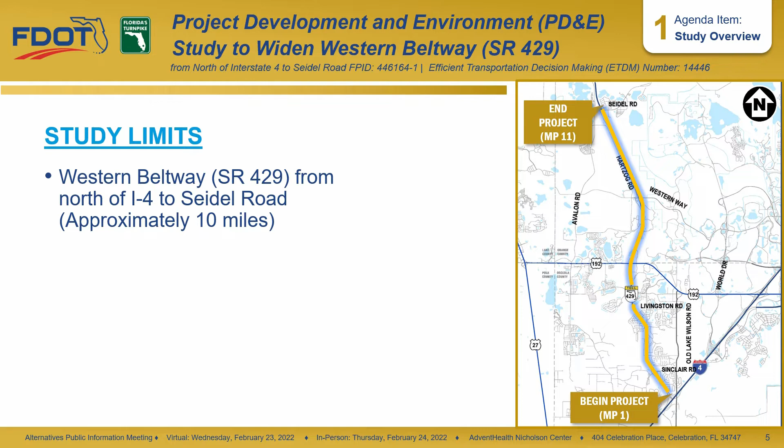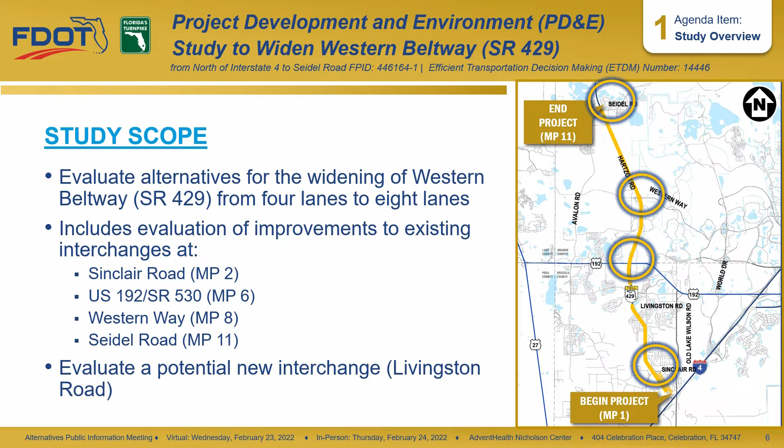The study limits extend from north of Interstate 4, milepost 1, to Seidel Road, milepost 11. The project is located within Osceola and Orange counties. The study scope includes evaluation of alternatives for the widening of Western Beltway from 4 lanes to 8 lanes and evaluation of improvements to existing interchanges at Sinclair Road, US 192, Western Way, and Seidel Road. The study scope also includes evaluation of a potential new interchange, which is proposed at Livingston Road.

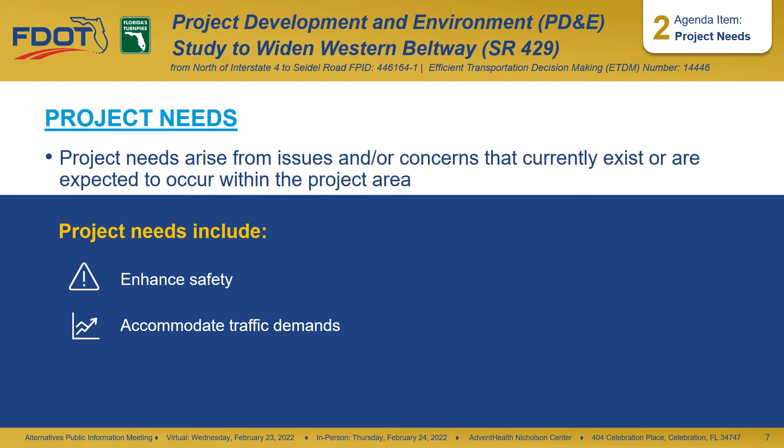Project needs arise from issues and concerns that may frequently slow down traffic, cause delays, or lead to accidents. The need to widen the Western Beltway is based on enhancing safety, accommodating travel demand through the year 2050, improving travel times and reliability, and enhancing economic viability, emergency responsiveness, and evacuation times.

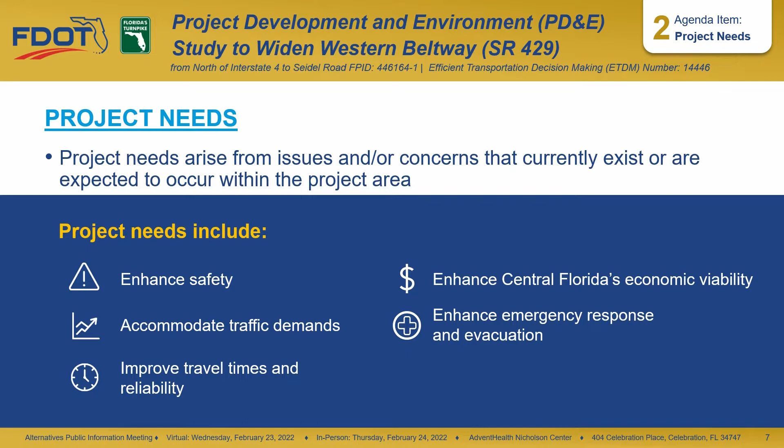Improvements to Western Beltway are needed to enhance safety. Between 2014 and 2018, there were 161 crashes within the study limits between the I-4 ramps and Seidel Road interchanges. The estimated economic crash cost is about $33 million over the 5 years. Congestion is a major contributing factor to crashes. If nothing is done, congestion will continue to rise, leading to an increase in crashes.

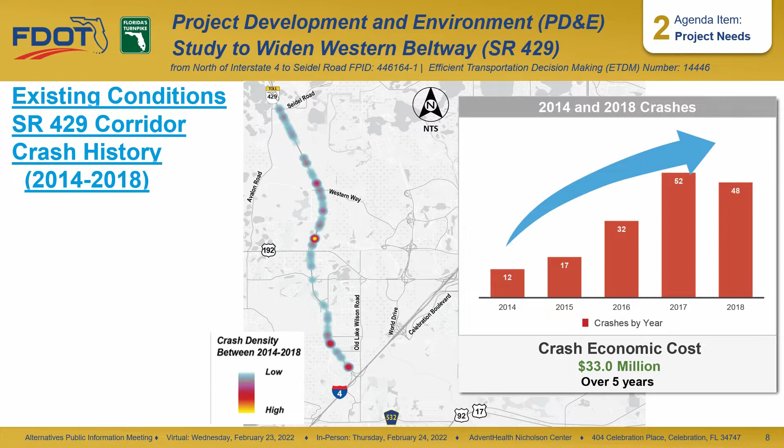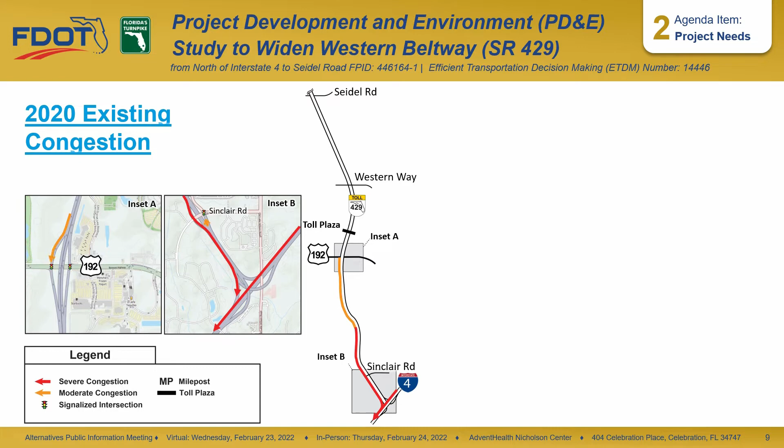The State Road 429 traffic has been increasing by more than 10% per year in the recent past years within the study limits. This can be attributed to the high increase in population and employment opportunities in the area, as well as recreational activities. During the evening commute, traffic backs up on State Road 429 in the southbound direction towards I-4, and long queues have been observed at the State Road 429 southbound off-ramp to US 192.

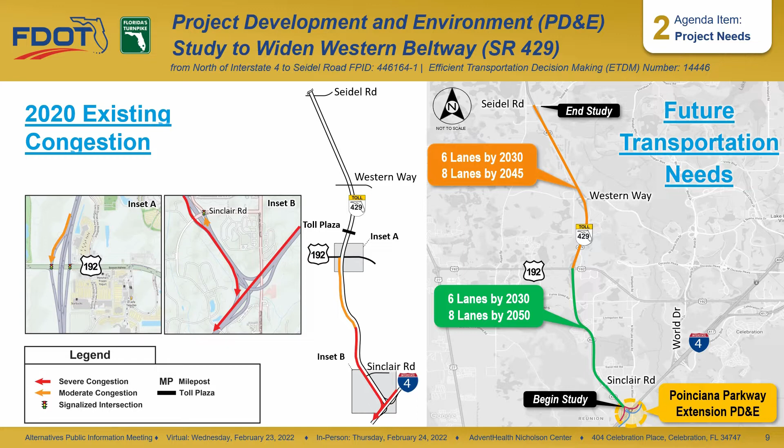In order to accommodate future travel demand, 6 lanes are needed by 2030 and 8 lanes will be needed by 2045 for the segment between US 192 and Seidel Road, and between I-4 and US 192 by 2050. The improvements considered as part of this study include both improvements to the main line and to the interchanges within the project limits, and also a planned connection to the Poinciana Parkway extension planned to the south as part of a separate study.

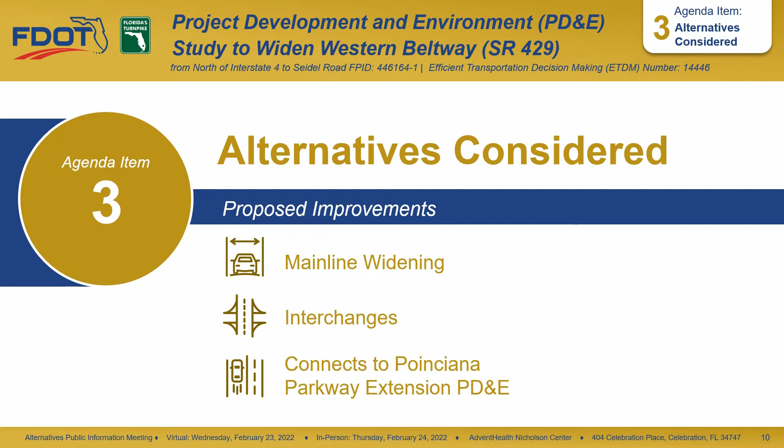In addition to widening the main line, proposed interchange improvements from south to north within the project limits include operational improvements at Sinclair Road, a new interchange at Livingston Road, operational improvements at US 192 and Western Way, and 2 options for interchange improvements at Seidel Road. The no-build alternative will remain viable throughout the study. We will cover all of these proposed improvements in additional detail.

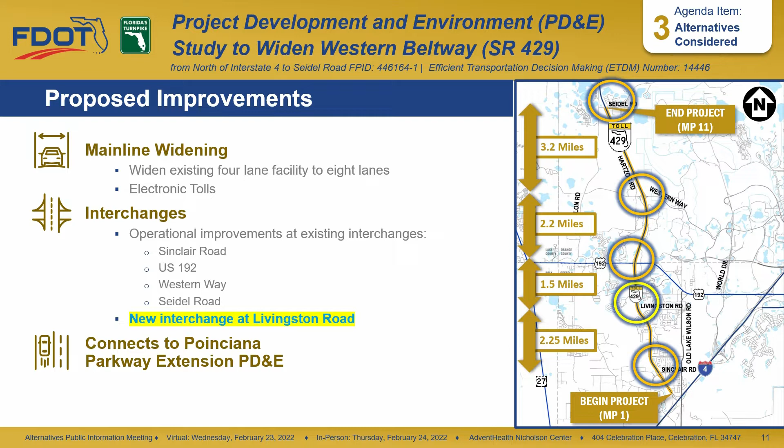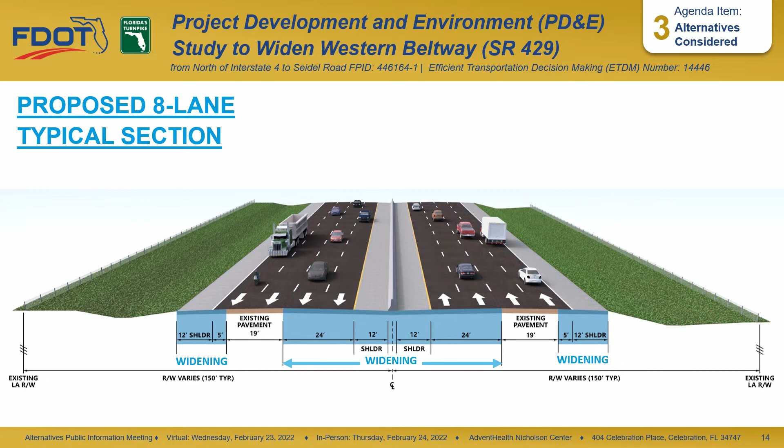Western Beltway will be widened from 4 lanes to 8 lanes throughout the project limits. This graphic shows the existing 4-lane typical section with a 64-foot median. The proposed mainline improvement widens the roadway to both sides. The proposed ultimate 8-lane typical section after widening to both sides includes 4 travel lanes in each direction. Now, we will cover the interchange improvements from south to north, starting with the existing Sinclair Road interchange 1 mile north of I-4.

This presentation shows aerial views of the conceptual design of the proposed improvements with north oriented to the right as shown. The legend shows the difference between any existing and proposed signals shown on the aerial view. This graphic shows where the project begins and the first interchange at Sinclair Road.

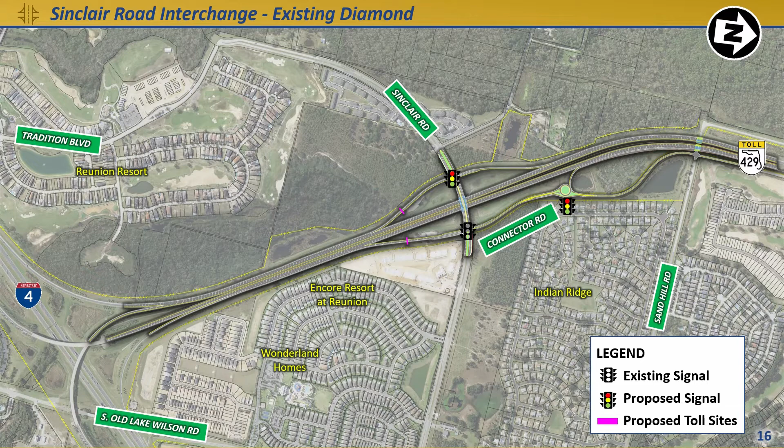The Poinciana Parkway Extension PD&E Study includes improvements to the I-4 interchange and the Sinclair Road interchange. If Poinciana is constructed, Western Beltway widening would interface with that project north of Sand Hill Road. However, if the Poinciana Parkway Extension project is not constructed, the Western Beltway widening would start further south at the I-4 ramps. The existing Sinclair Road Diamond interchange and the existing signal at the southbound off-ramp would remain.

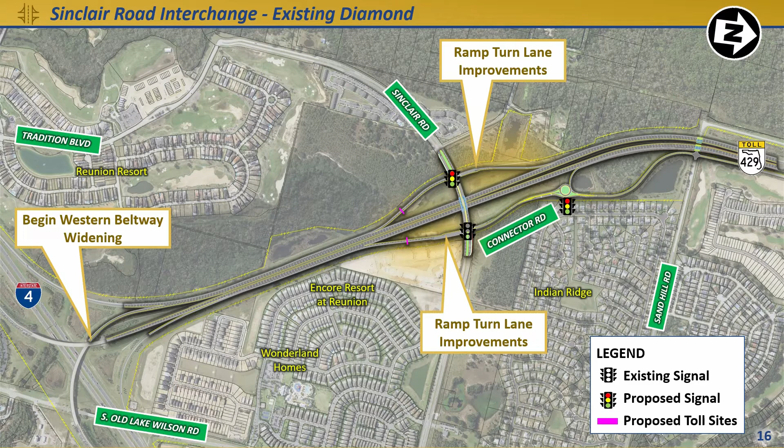Traffic signals would be added for the northbound off-ramp and the southbound on-ramp, as well as turn lanes at all the ramps. These improvements would allow the interchange to operate at a higher level of service in the future as traffic increases. There are 2 options for the Connector Road intersection with a northbound on-ramp. We will take a closer look at these options.

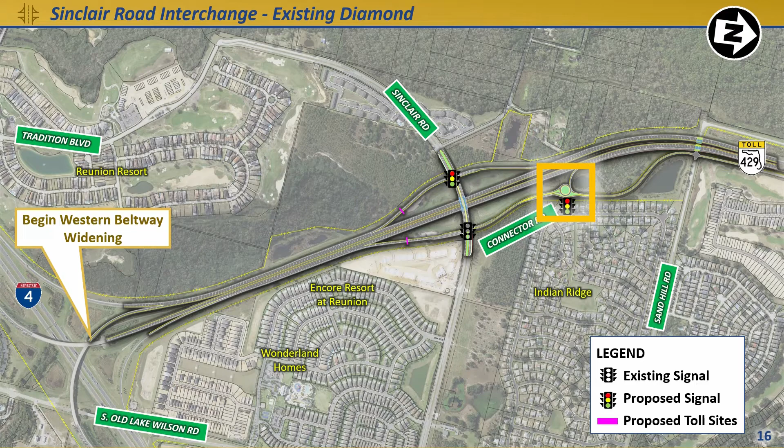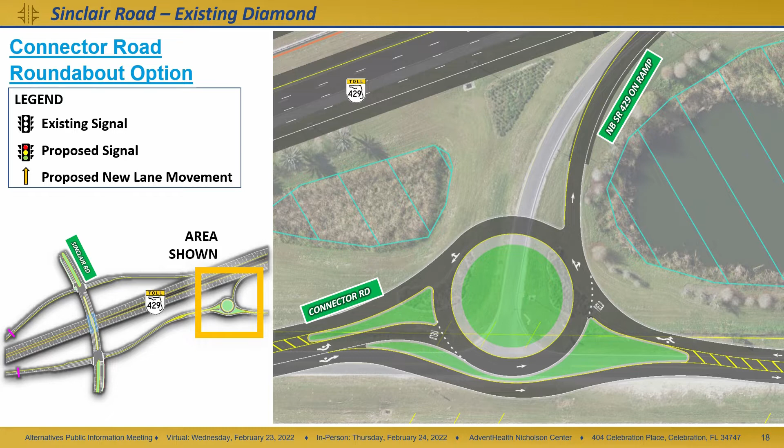The first option is the signalization option, which adds a signal at the ramp terminal's intersection with Connector Road, as well as a turn lane in each direction. The second option would be the addition of a roundabout at the same intersection instead of a traffic signal to control all turning and through movements. The roundabout option shown offers the same movements as the signalization option.

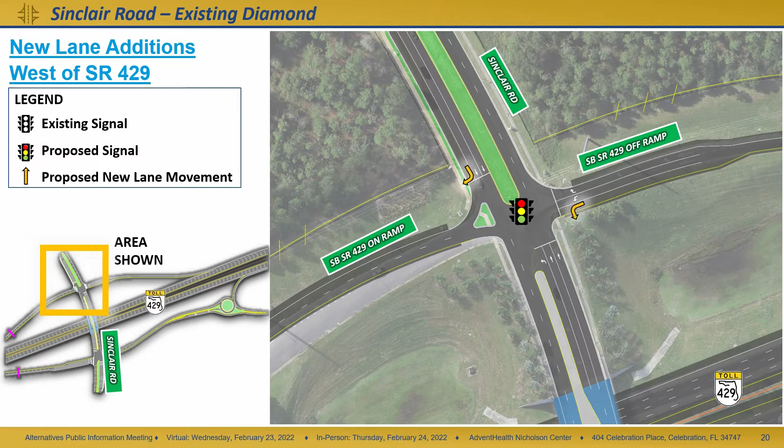Moving to the intersection of the ramp terminals and Connector Road at Sinclair Road, the existing signal would remain, but turn lanes would be added at 3 of the 4 intersection approaches. Moving west of State Road 429, a new signal would be added at the ramp terminal intersection with Sinclair Road, as well as a right turn lane on Sinclair Road and a left turn lane at the southbound ramp terminal.

The table shown is an evaluation matrix that compares the Sinclair Road interchange alternatives. Both Sinclair Road options have traffic and safety benefits that offer significant improvement over the no-build option. The roundabout option offers the most benefits at a higher cost as compared to the signalization option.

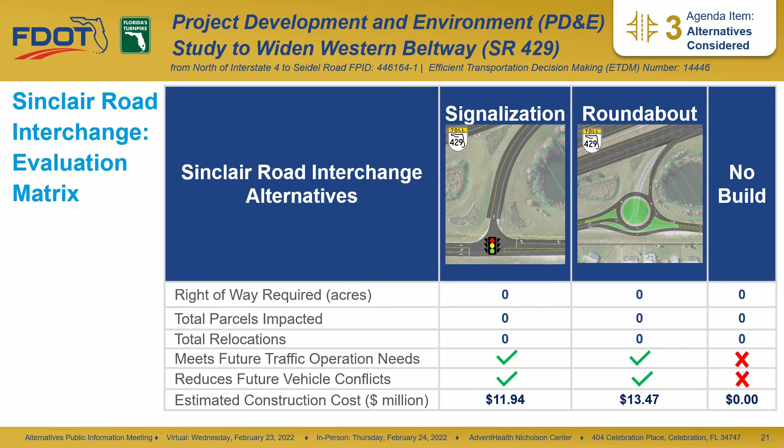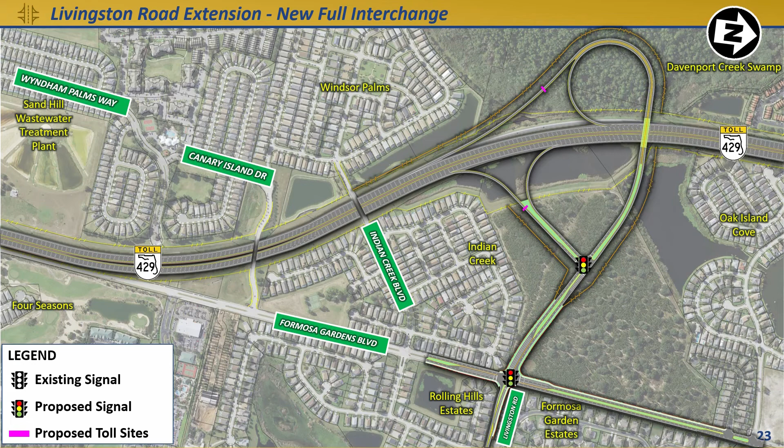The next interchange would be a new interchange located 2¼ miles north at an extension of Livingston Road. This new interchange will relieve US 192 and provide additional mobility in the study area. The new Livingston Road interchange would offer full access between State Road 429 from an extension of Livingston Road as shown. The new interchange would provide for all movements with loops to the south side as shown here. The ramps to and from the south would be tolled with the exact location to be determined.

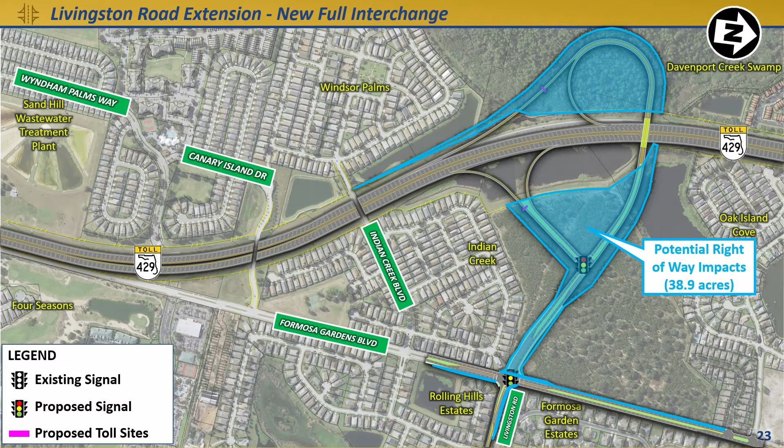This improvement would include widening Formosa Gardens Boulevard for about 1/2 mile to eliminate the short section of 2-lane roadway and match the existing 4-lane condition south and north of Livingston Road. The blue highlighted areas show the location of potential right-of-way impacts where additional land would be required to accommodate the improvements. We will take a closer look at the beginning of the proposed Livingston Road extension first.

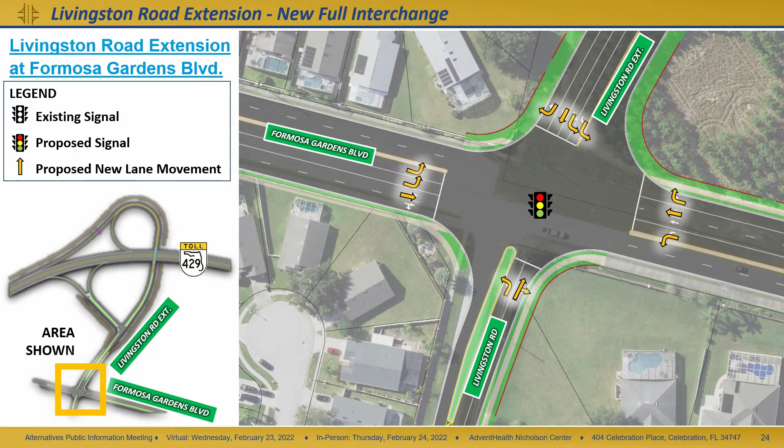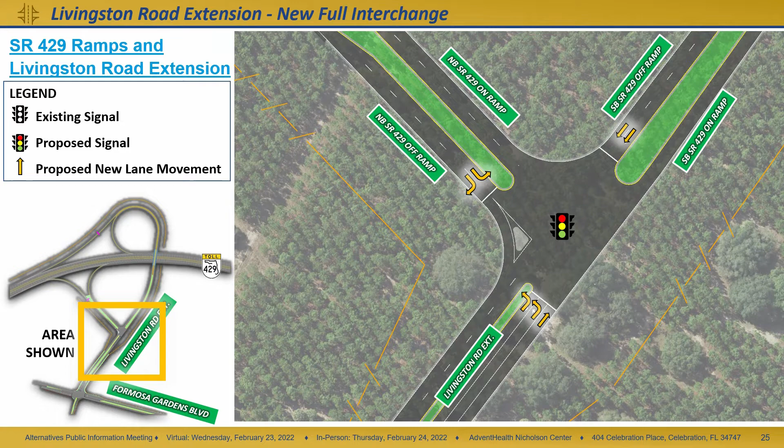The extension of Livingston Road past Formosa Gardens Boulevard includes improvements to the intersection. These improvements include a new signal as well as additional turn and through lanes at every intersection approach. The new T intersection at the extension of Livingston Road and the State Road 429 ramp terminals would be signalized and include new movements at all approaches to grant access to State Road 429 northbound and southbound.

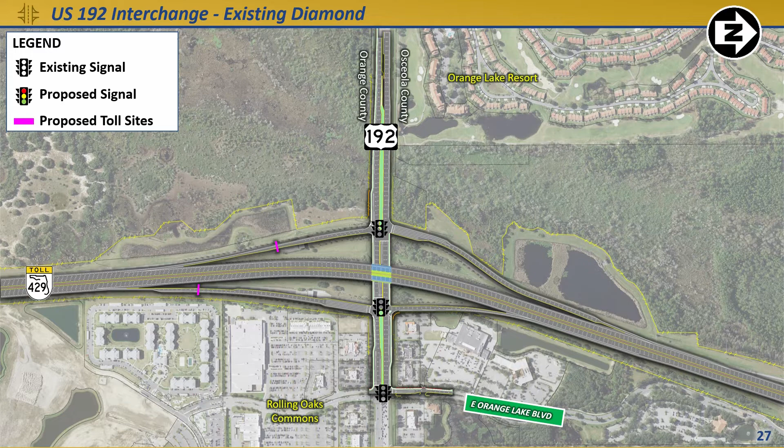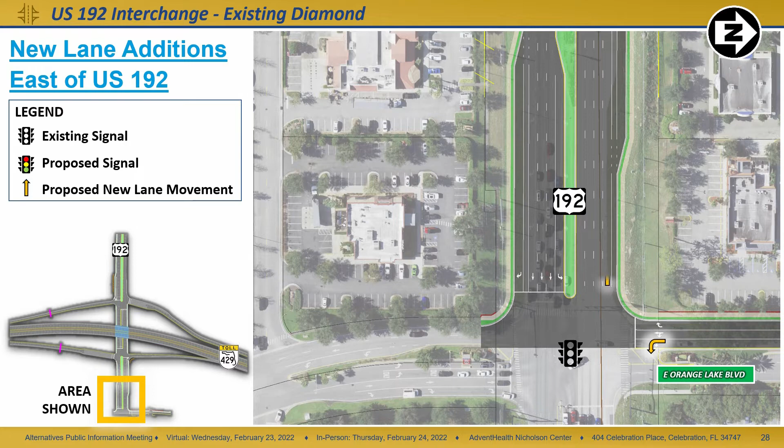We will take a closer look at the intersection improvements associated with the interchange, starting at East Orange Lake Boulevard. On East Orange Lake Boulevard, a new left turn lane would be added at US 192 at the existing signalized intersection, and a new through lane begins on US 192.

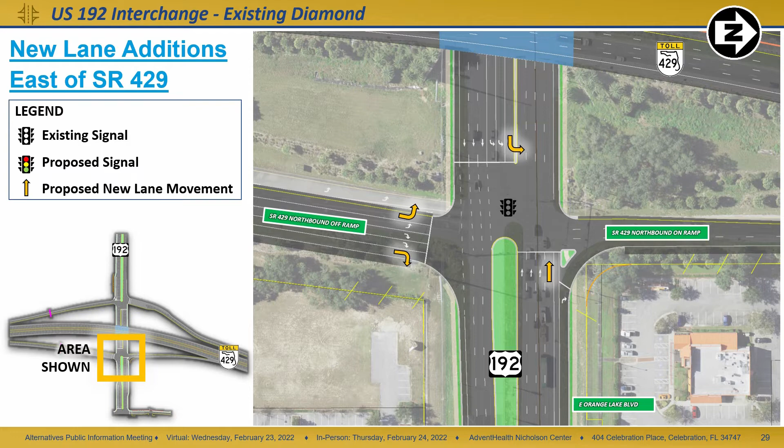Moving along US 192, closer to State Road 429, an additional through lane would be added onto US 192 westbound. In addition, turn lanes would be added on US 192 and at the State Road 429 ramp terminal. West of State Road 429, an additional through lane would be added in each direction on US 192, along with additional turn lanes at the State Road 429 ramp terminal.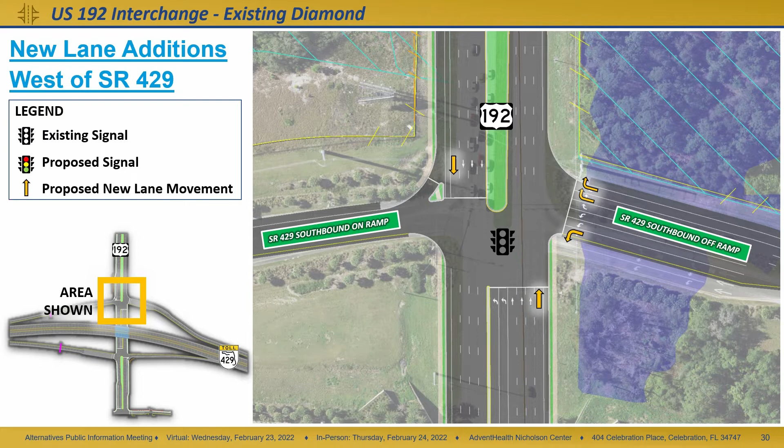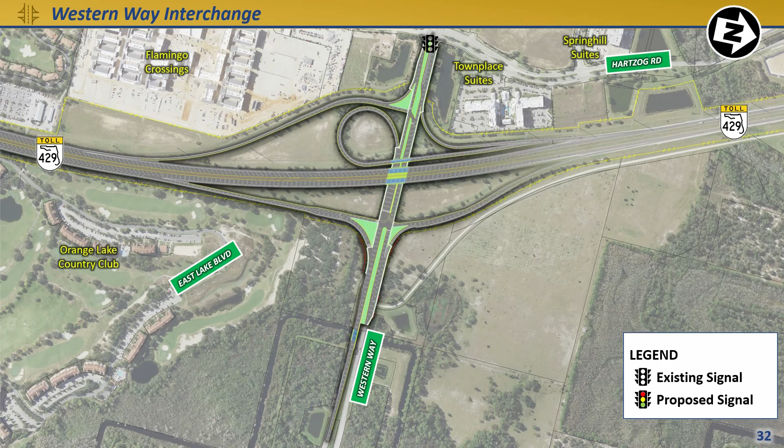Located 2.2 miles north, Western Way is the next interchange with modifications proposed. The proposed Western Way interchange is shown here. The main improvement at Western Way is the addition of a second lane to the southbound loop ramp as shown. Other improvements include signals at the ramp terminals and additional turn lanes at both intersections.

The improvements shown are generally within existing right-of-way, but may require a small amount of right-of-way to be acquired. We will take a closer look at the intersection improvements on Western Way starting at the ramp terminals east of State Road 429.

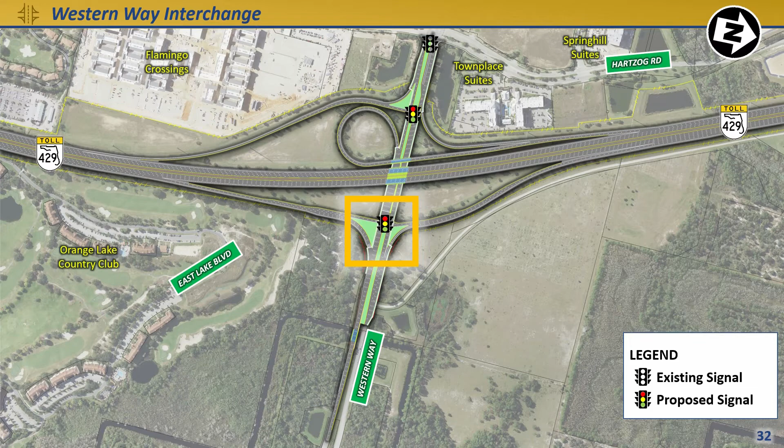Intersection improvements include a new signal as well as additional through lanes in each direction on Western Way. Additional turn lanes would be added at each intersection approach as shown. Moving west of State Road 429, a signal would be added at the ramp terminal as well as an additional left turn lane accessing the State Road 429 southbound on-ramp.

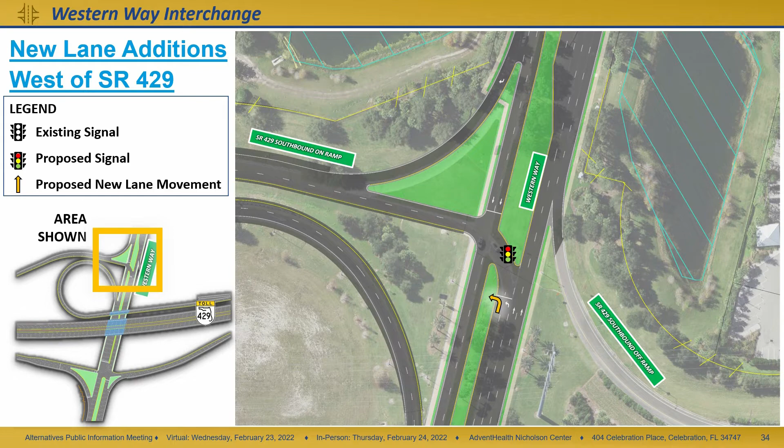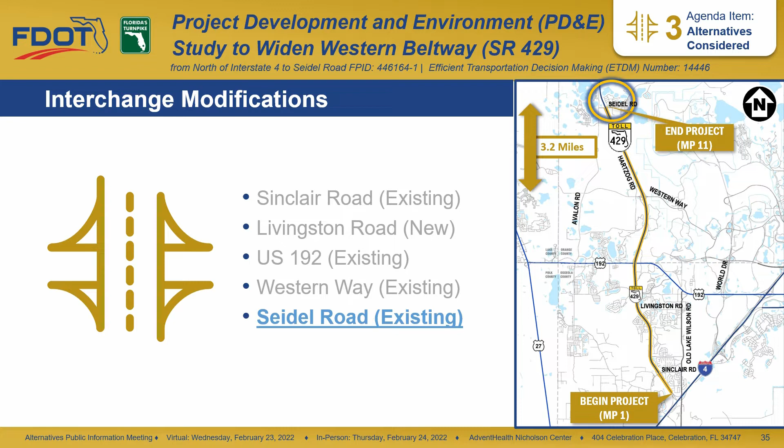The Seidel Road interchange, located 3.2 miles north of Western Way, is an existing interchange with proposed modifications. Two options for Seidel Road are under consideration. Both Seidel Road options would include widening the existing State Road 429 bridges over Seidel Road and a second left turn lane added approaching Avalon Road.

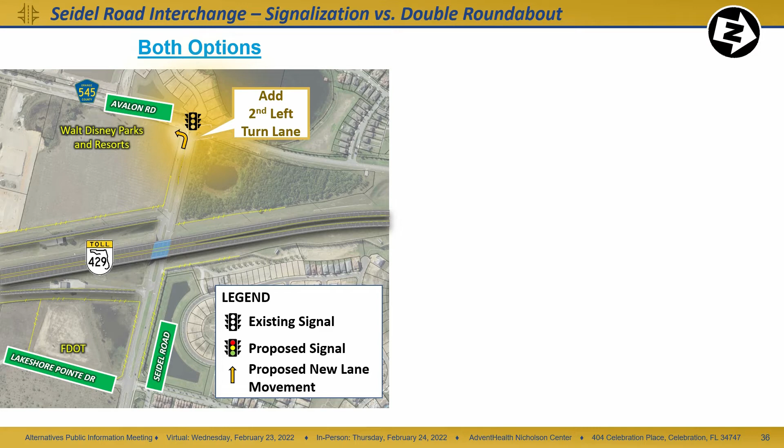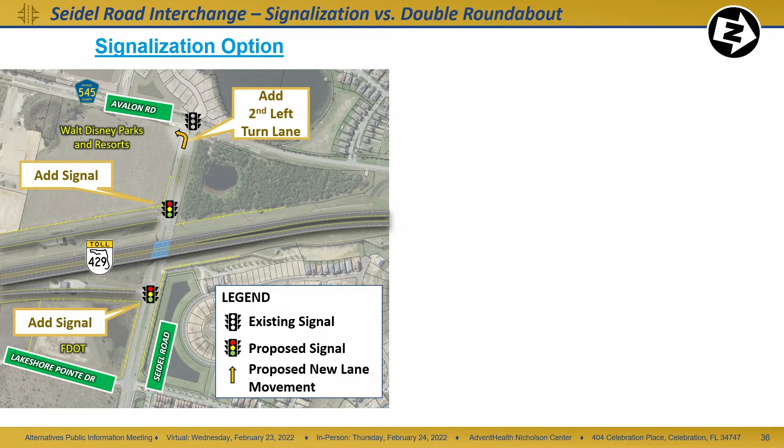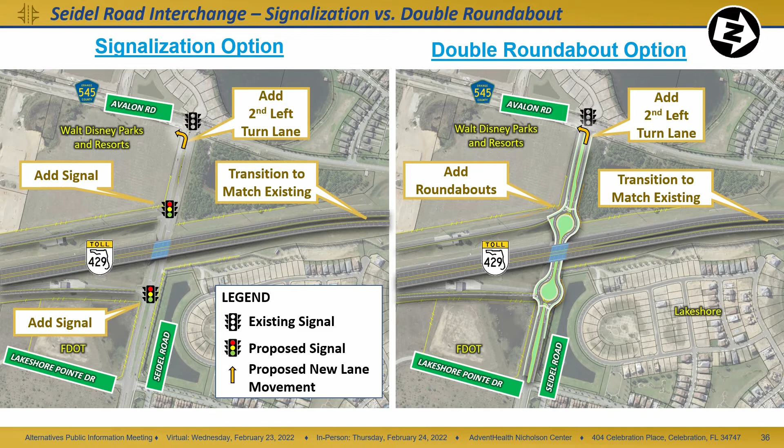The first option at Seidel Road is the signalization option, which includes the addition of signals at both ramps to control traffic movements. No additional right-of-way is required for the signalization option. The second alternative is the double roundabout option shown on the right, which adds a double roundabout through the interchange area instead of the two traffic signals proposed by the signalization option. For both alternatives, State Road 429 would transition to the existing configuration north of Seidel Road. The double roundabout option requires a total of 0.6 acres of additional right-of-way from 5 parcels.

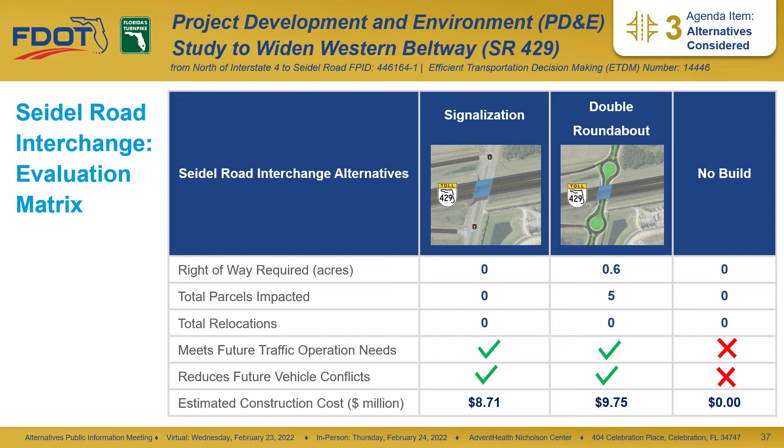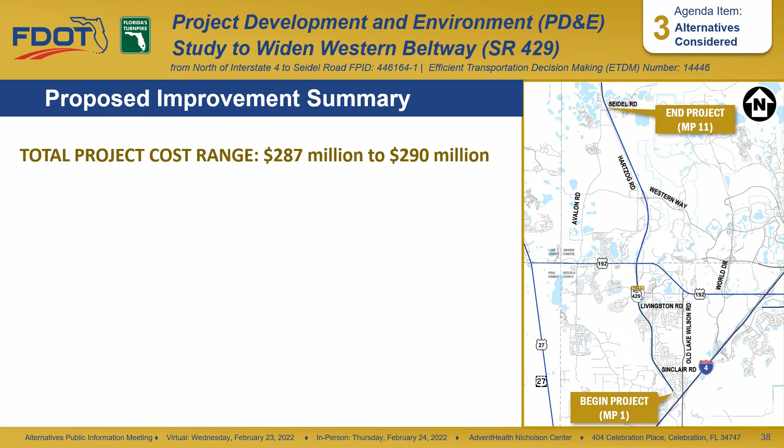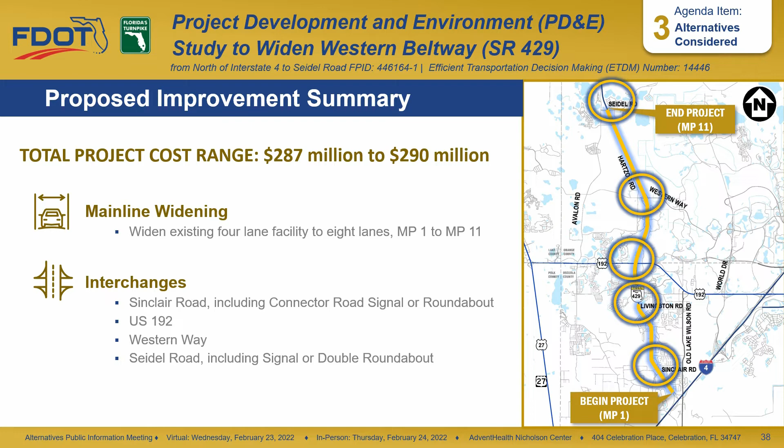The cost of the proposed improvements ranges from $287 million if the signalization options are selected at Sinclair Road and Seidel Road to $290 million if the roundabout options are selected at those locations. These costs include widening the State Road 429 main line within the project limits, the operational improvements described in this presentation at the interchanges shown, and the new interchange at the proposed Livingston Road extension.

As part of the study, Florida's Turnpike Enterprise is evaluating the potential social, natural, physical, and cultural effects of the project and of each alternative. Features listed are just some of the types of analysis included in this PD&E study. Avoidance or minimization of impacts to these features is a key consideration. Impacts that cannot be avoided will be mitigated.

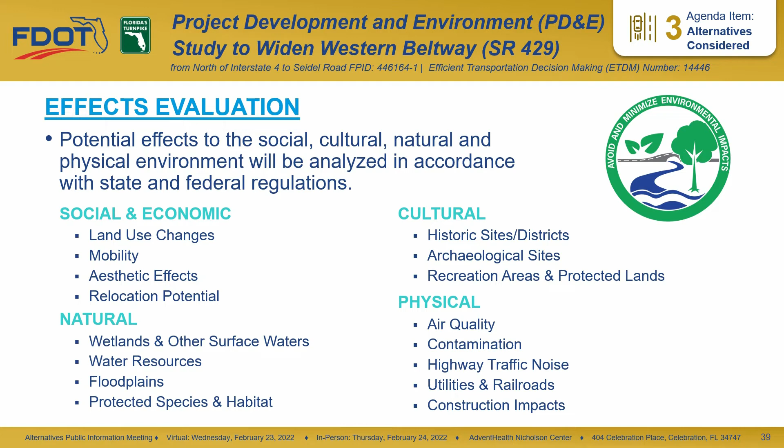Public involvement is a very important part of the PD&E study process. Various outreach methods will take place throughout the life of the PD&E study. 2 public meetings will be held for this study. Today's meeting, the Alternatives Public Information Meeting, is the first meeting for this study. The second meeting will be the public hearing. In addition to the scheduled public meetings, other outreach methods include the distribution of newsletters, information posted to the project website, www.sr429i-4toseidel.com, and other meetings with stakeholders and small groups.

Throughout this study, Florida's Turnpike Enterprise will coordinate with the Central Florida Expressway Authority, the Reedy Creek Improvement District, MetroPlan Orlando, and Osceola and Orange counties. After tonight's meeting, we will review public comments in conjunction with the social, cultural, environmental, and engineering factors to reach a recommendation on a preferred alternative. The preferred alternative will then be presented to you at the public hearing, tentatively scheduled for the end of this year. This study is expected to be completed by early 2023. Please note that this schedule is subject to change and that subsequent project phases, including design, right-of-way, and construction, are not currently funded.

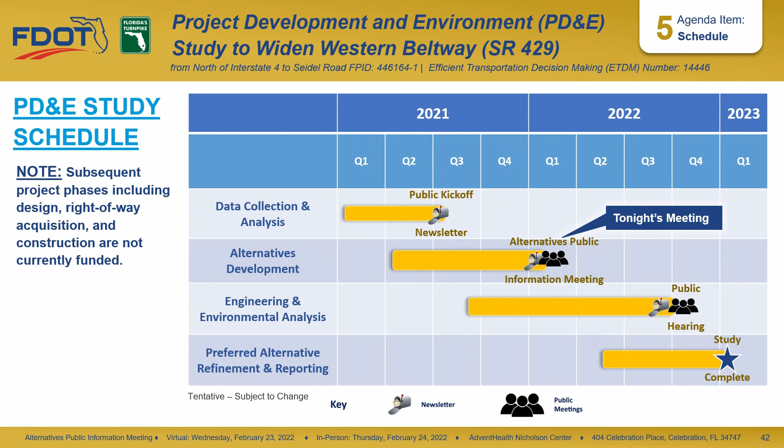Your comments are essential to this process and will help Florida's Turnpike Enterprise understand your concerns and suggestions for improvements. We encourage you to provide a written comment tonight, or, if you prefer, you may mail your comments or submit by email. All contact information is also included in the project handout. You can also submit your comments directly through the project website. The website address is www.sr429i-4toseidel.com. We would appreciate your written comments by March 10th, 2022.

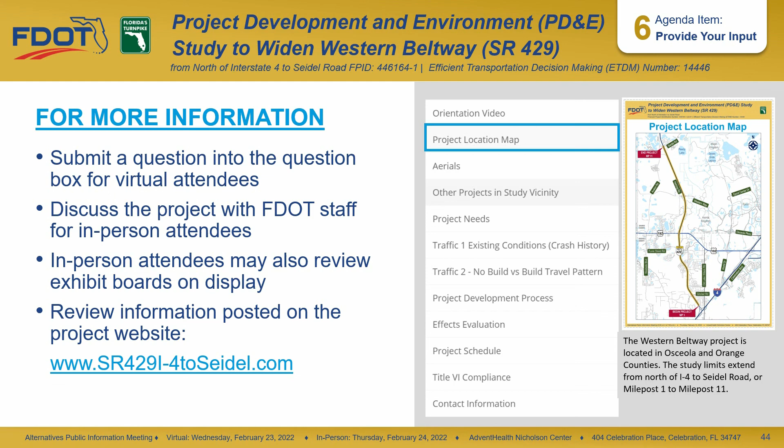For more information, attendees of the virtual meeting can submit a question via the GoToWebinar question box or using one of the previously mentioned communication methods after the meeting. All attendees may also review the project information posted on the project website, which includes all the information presented at tonight's meeting. In-person attendees may ask questions to Turnpike representatives and review the aerial maps and other exhibits on display. After this meeting, if you would like to speak with someone, please contact one of the Turnpike representatives as noted in your handout.